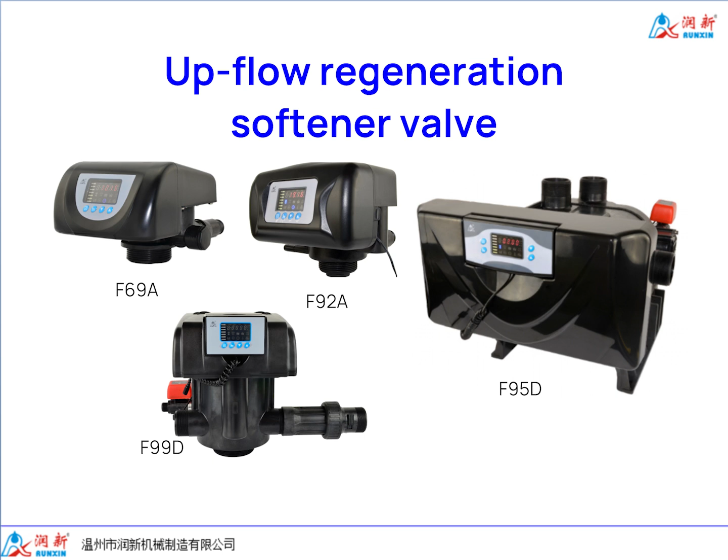Upflow regeneration softener valve. When in regeneration, the direction of the brine flow of the upflow regeneration softener valve is opposite to the service water flow, typically with the service water flow moving from top to bottom and the brine and slow rinse water flow moving from bottom to top.

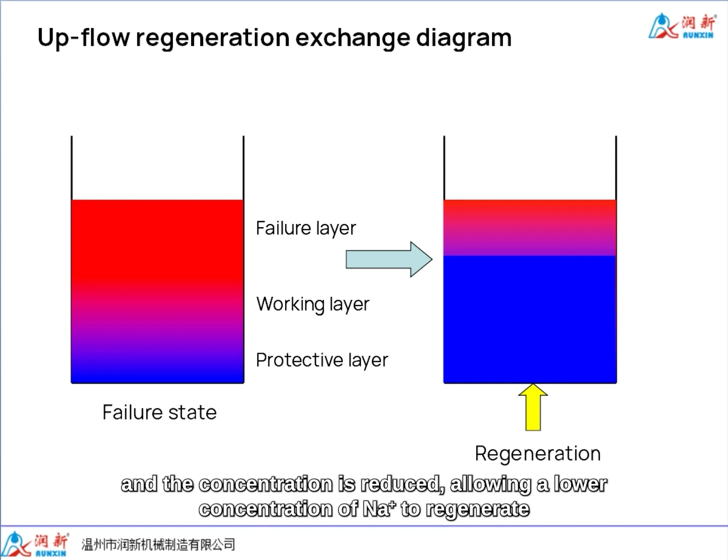During regeneration, the brine first contacts the less exhausted protective layer of the resin. By the time it reaches the most exhausted resin layer, the calcium ion and magnesium ion exchanged have been discharged, and the concentration is reduced, allowing a lower concentration of sodium ion to regenerate. This results in lower salt and water consumption and better regeneration effects.

Preventing resin layer disorder is the prerequisite for salt and water saving in upflow regeneration. When the raw water turbidity is low, it is not necessary to backwash with each regeneration cycle. The valve's interval backwash times, F00, can be set based on the water turbidity, enabling multiple cycles of service followed

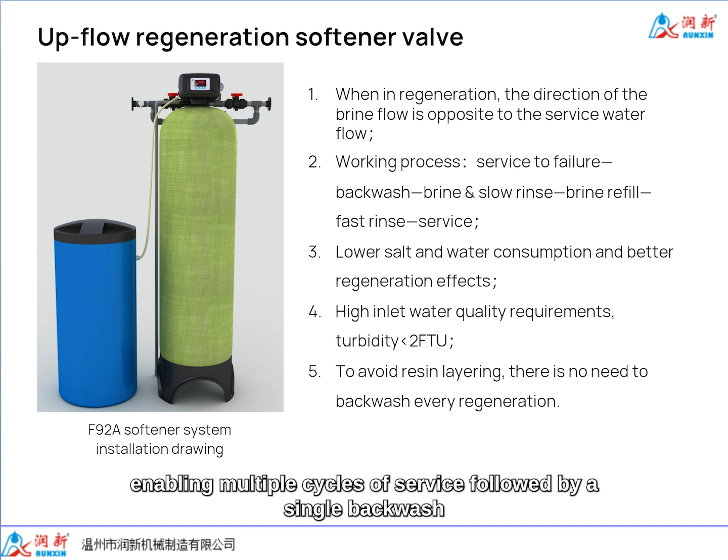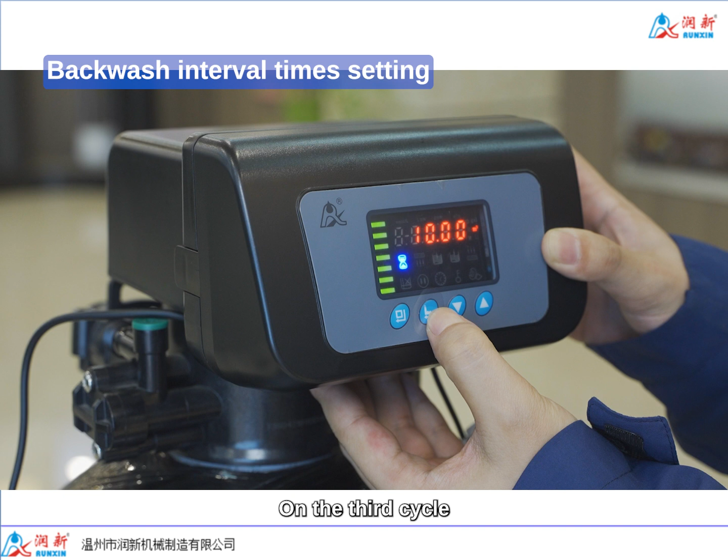by a single backwash. For example, F02 indicates that backwash occurs every 2 cycles: during the first 2 cycles of regeneration, it goes to brine draw without backwash. On the 3rd cycle, backwash is performed, followed by brine draw.

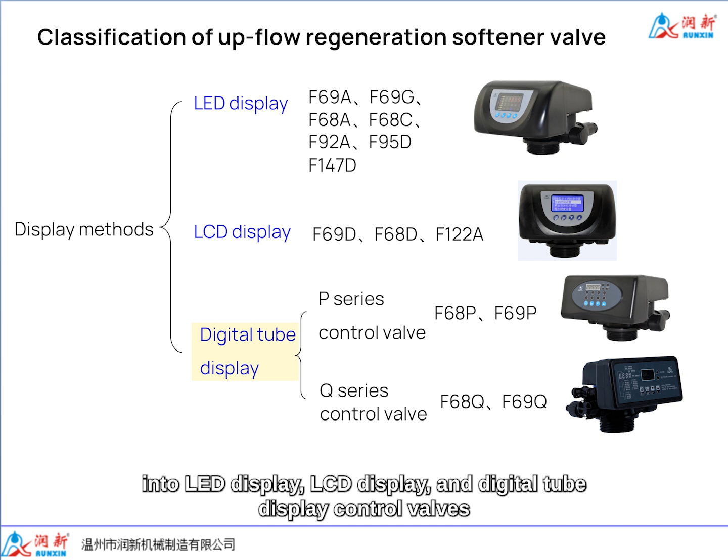Upflow regeneration softener valve is categorized based on display methods into LED display, LCD display, and digital tube display control valves. LED display models include F69A, F69G, F68A, F68C, F68G, F92A, and F99D with flow rates ranging from 2 to 15 cubic meter per hour.

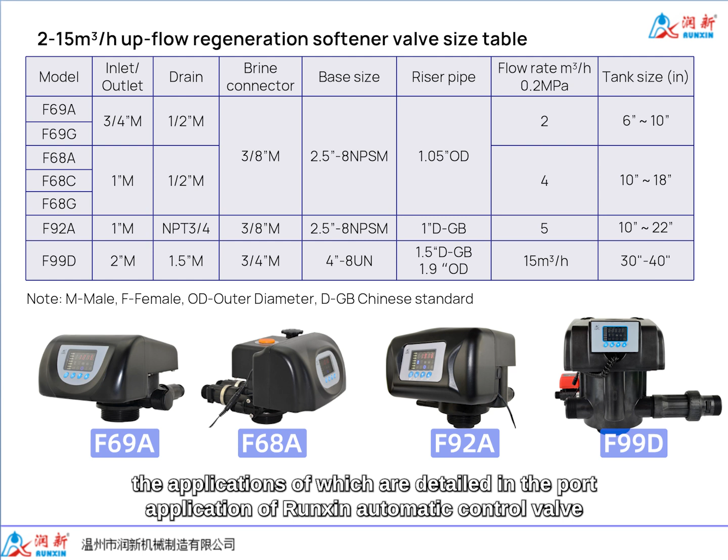These models come with signal output ports and remote control ports, the applications of which are detailed in the port application of Runxin automatic control valve. The F92A with a flow rate of 5 cubic meter per hour controls brine draw and water refill through a small valve designed on the injector body, reducing the number of main valve flow paths to achieve a larger flow area, thus obtaining the goal of a small valve body with high flow rate.

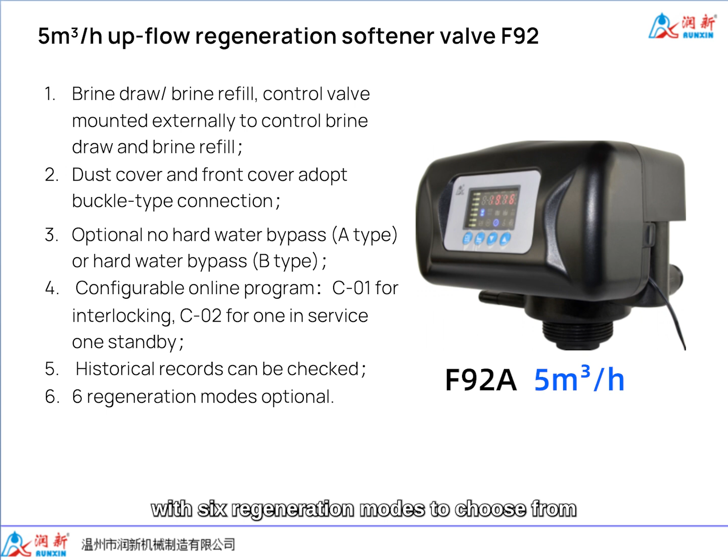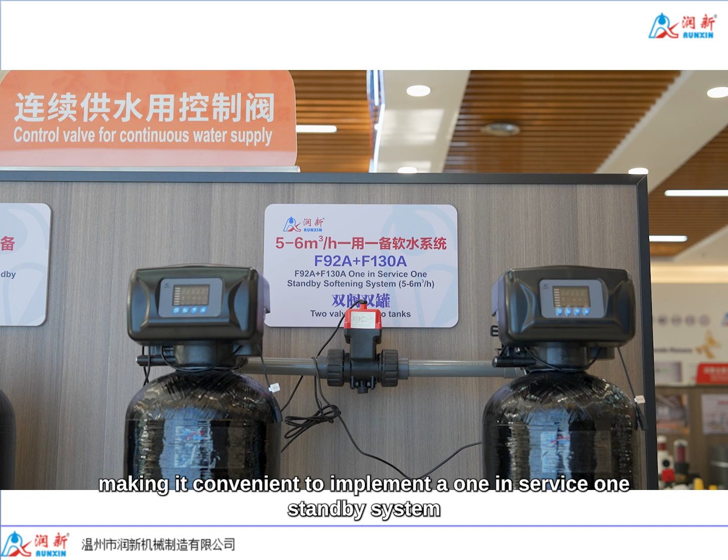It is available with options for no raw water bypass type A and with raw water bypass type B. It allows for program queries of the maximum flow rate and the number of regenerations that have occurred in the last 7 days, with 6 regeneration modes to choose from. It can be set up with a C02 1 in service 1 standby online program, compatible with Runxin 3-way ball valves, eliminating the need for additional devices, making it convenient to implement a 1 in service 1 standby system.

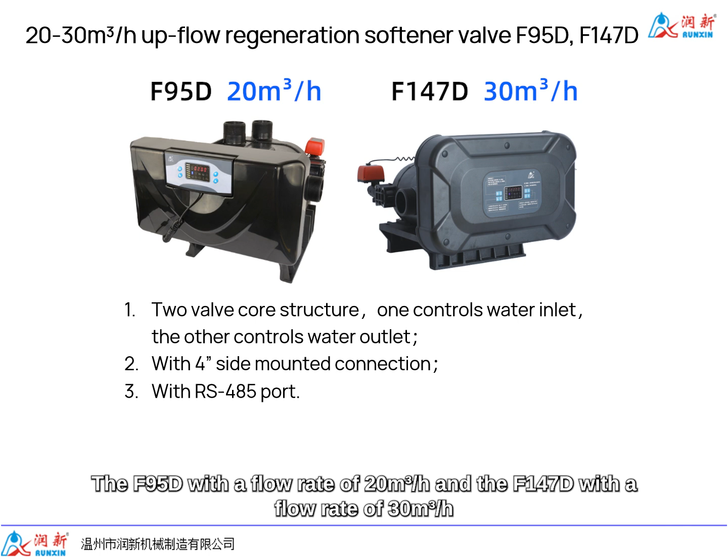The F95D with a flow rate of 20 cubic meter per hour and the F147D with a flow rate of 30 cubic meter per hour feature a dual valve core structure, come with their own brackets, and use side-mounted connections with RS485 ports for connecting to PLC and other devices for remote control.

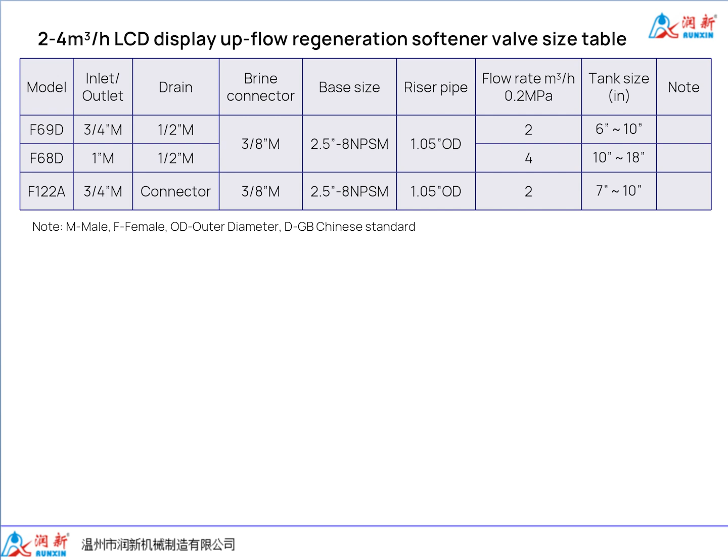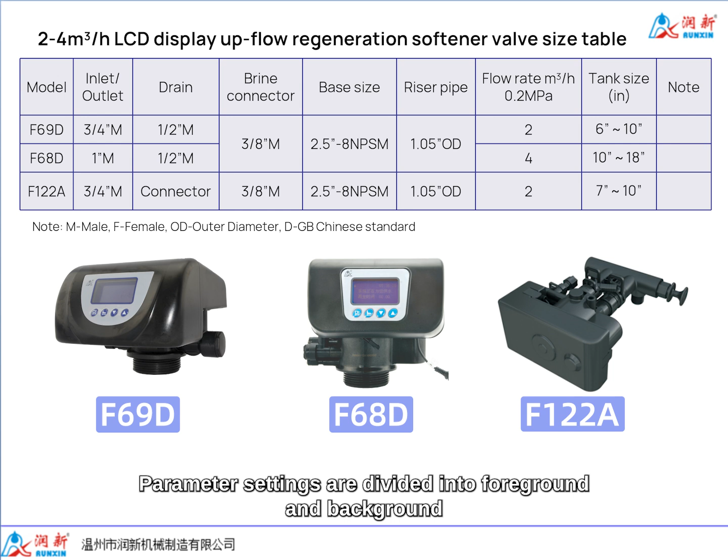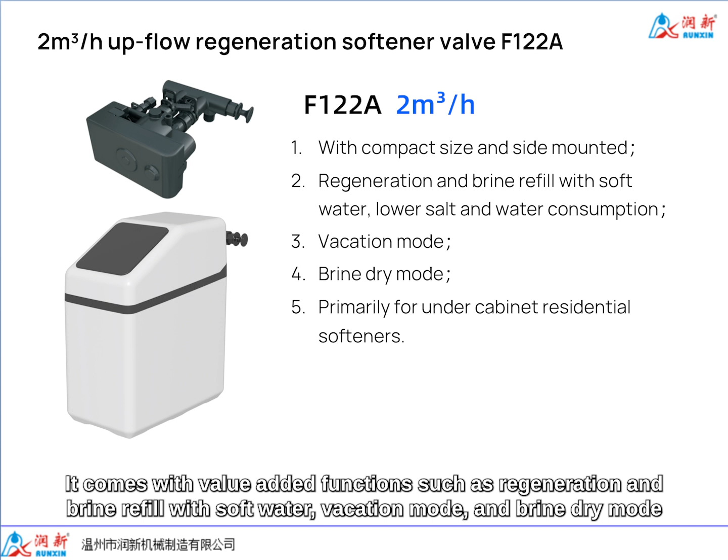The LCD display models include F69D, F68D, and F122A with flow rates ranging from 2 to 4 cubic meter per hour. Parameter settings are divided into foreground and background. Among these models, the F122A features a side control design, compact size, and is primarily used for under-cabinet residential softeners. It comes with value-added functions such as regeneration and brine refill with soft water, vacation mode, and brine dry mode.

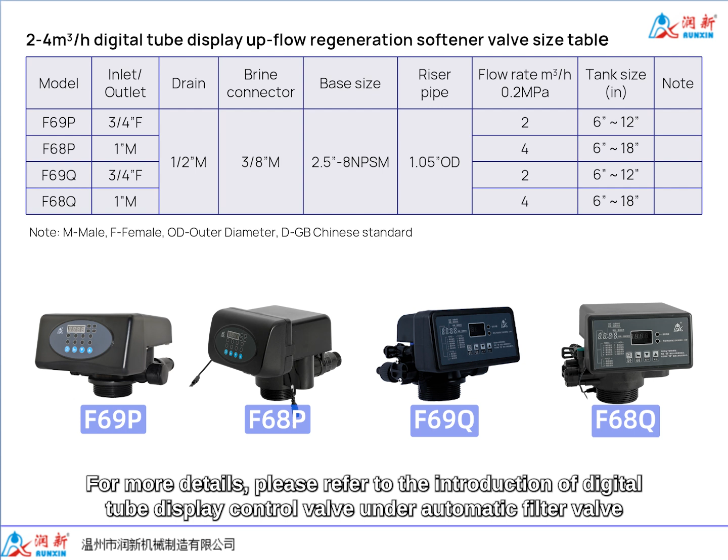The digital tube display models include F69P, F68P, F69Q, and F68Q with flow rates ranging from 2 to 4 cubic meter per hour, which is cost-effective. For more details, please refer to the introduction of digital tube display control valve under automatic filter valve.